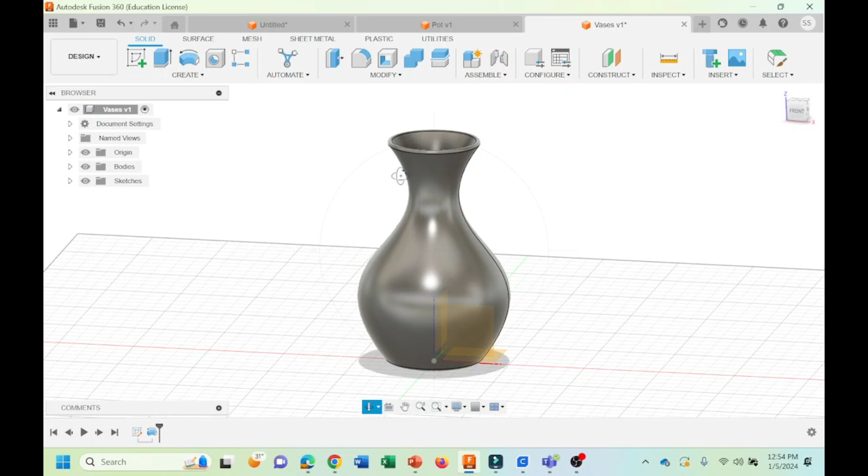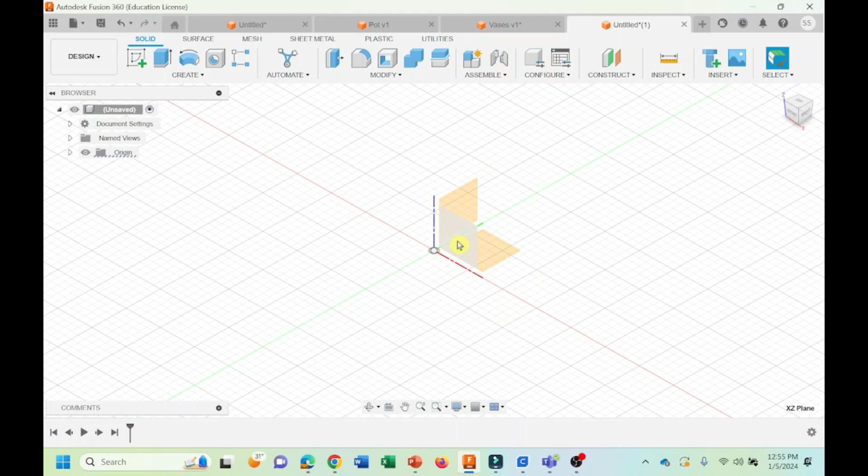So what we want to do, we want to design a vase like this, so we are able to change its shape and give it any different dimension. So let's see how we could do that. As usual, we are going to have a new design. I'm going to turn on the origin. I want to use the revolve and revolve it around the Z axis. For that reason, this time I'm using the XZ plane, right click and create my sketch there.

So if we go back to this, I could show you what I draw and then how I use the revolve. This is exactly what I'm going to draw. Then the revolve is around the Z axis. That means I need to use the line and also the spline to have this part. Then we are going to revolve that. So let's start to do that.

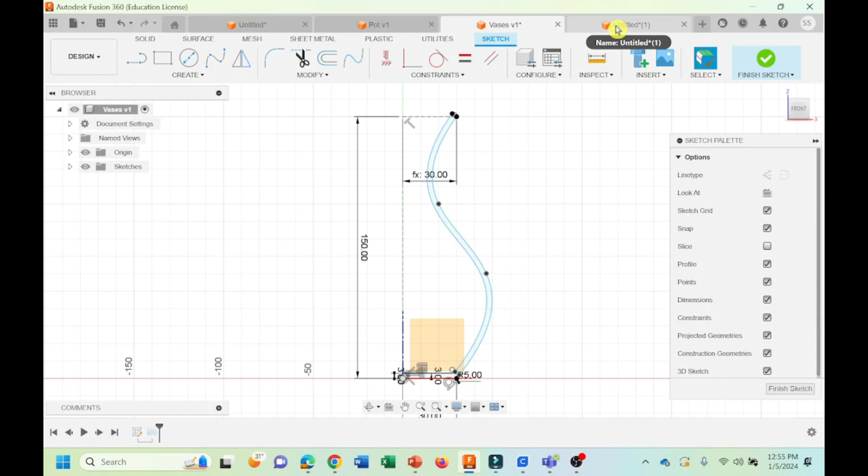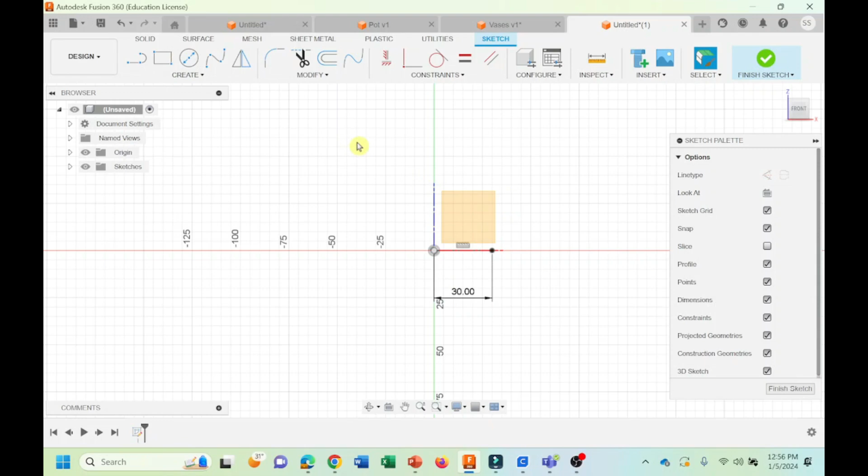For starting, first we are going to have a line. I'm going to use the line from here to here and use 30 millimeters, enter. The next line is going to show the height of the vase, so I need a construction line. Come here and go 150, enter. As you see, I have that 150. Another construction line from here, let's go 30 to that side, enter.

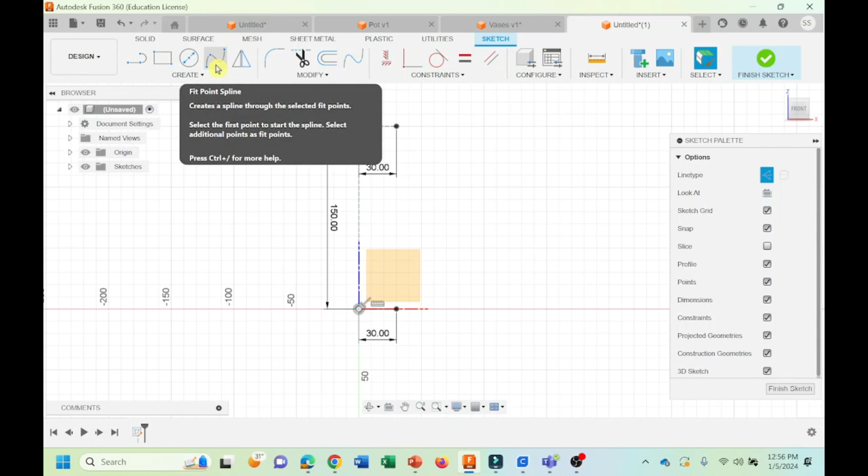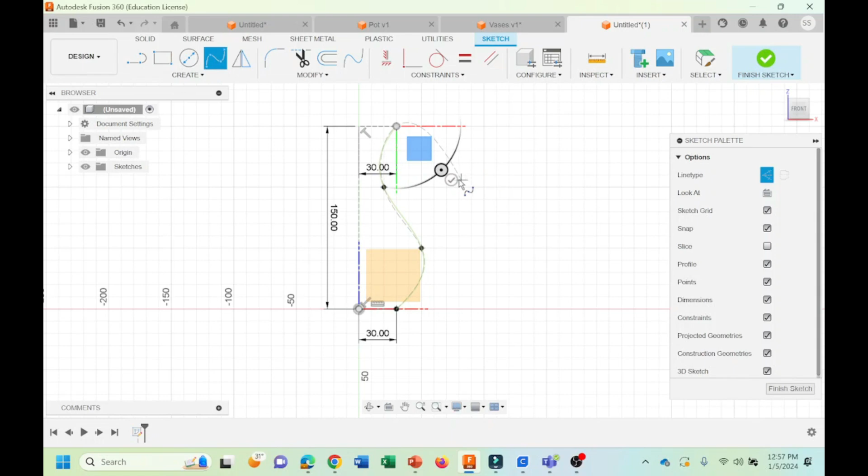So now after we have these 3 points, you come here and use the spline. I click on the spline, I click this point, come here, another click, come to this line, another click, and come to this point, another click. Whenever you want to finish the spline, you should find this tick mark here, usually somewhere on your working space. Now I found it, it changed to green, I click that.

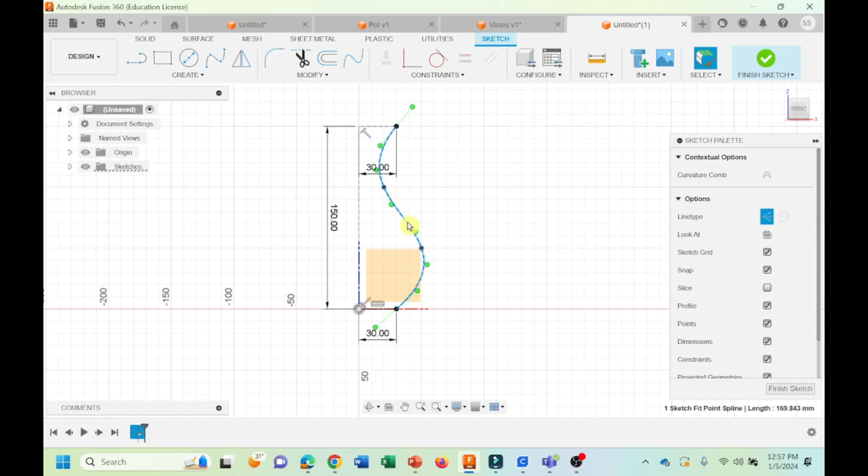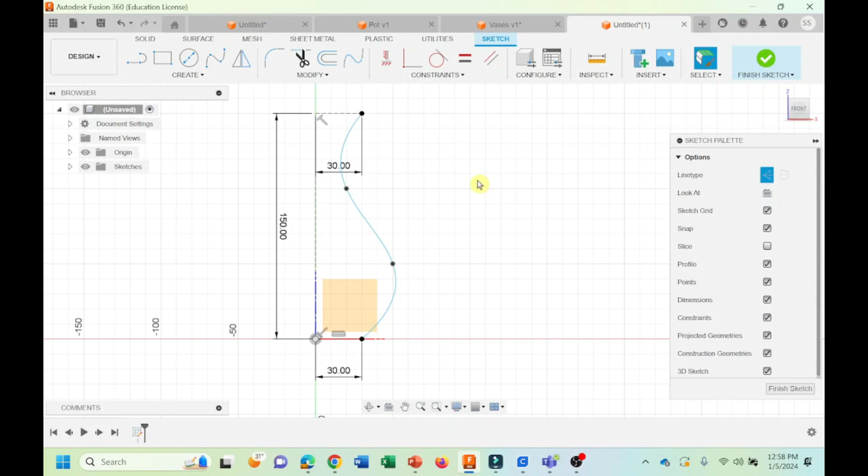As you could see, I made the spline. I don't want it to be a construction line, so I click on that and get rid of that. As you could see, we made the spline that you see here. Now I need to use the offset, to offset this by 3 millimeters, which will be the thickness of the vase. Come here, say offset, select all of these and go to 3 millimeters. Again, I don't want it to be a construction line, it should be just a line. If you zoom in a little, this shouldn't be a construction line, I fixed that.

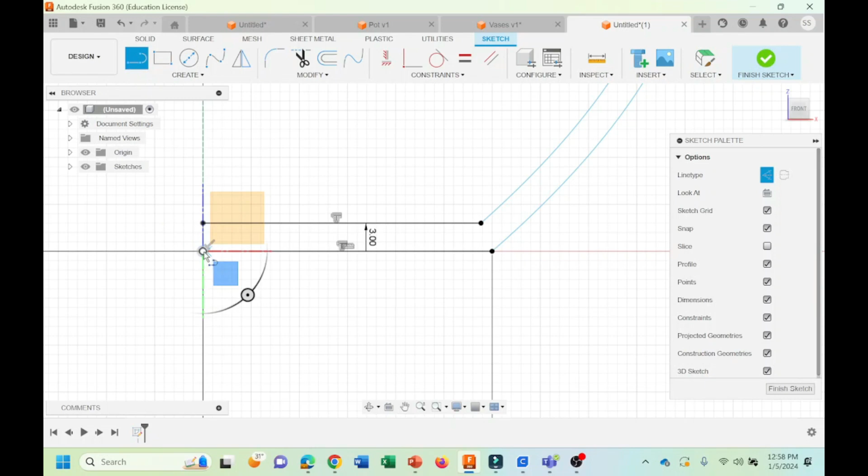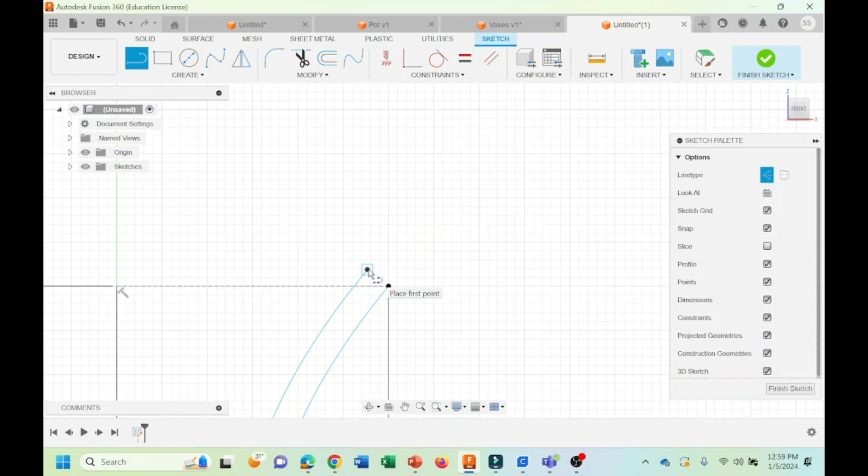Now I'm going to close these parts. I zoom in, I say line, I click from here to here, 3 millimeters, enter. Now I'm going to close the other side. If you zoom a little bit, first I'm going to use a construction line to connect this part to this part, enter. Let me redo that, it didn't get that. Let me try one more time. I say line, it's the construction line, from here to here, click. Yes, that should work. So now I have this.

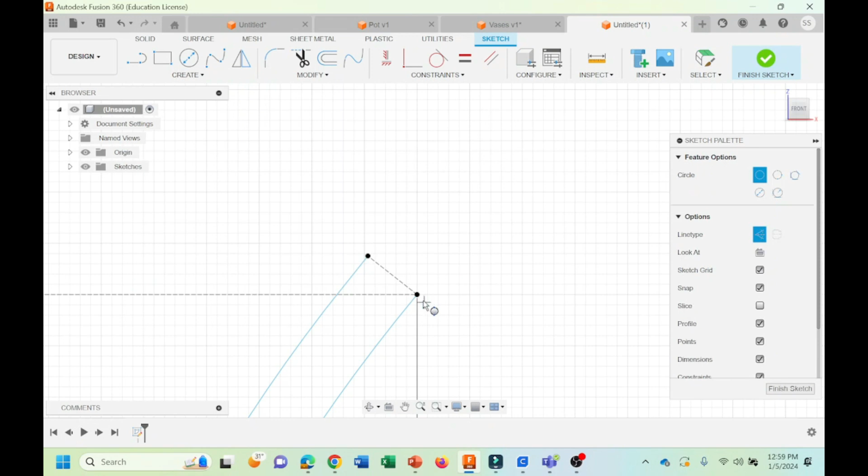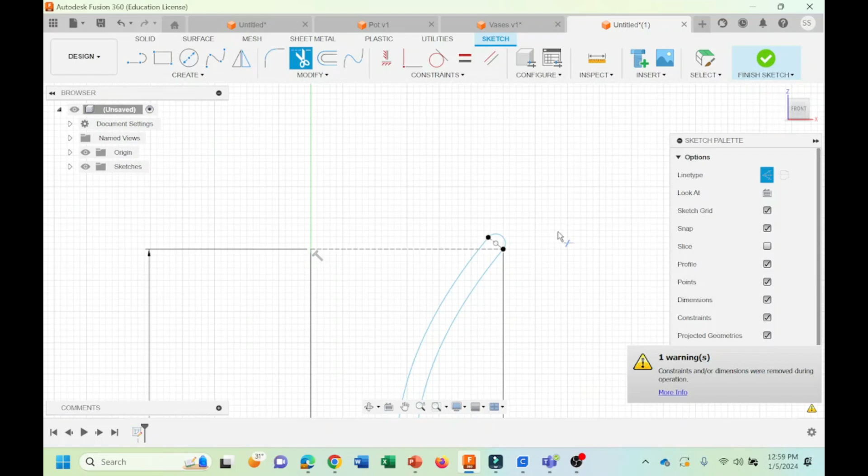I zoomed in a little more. Then I'm coming here and add a circle, a 2 point circle. I want a circle between these 2 points, enter. I don't want it to be a construction line, so I turn that into a real circle. Now I use the trim. I cut here and I also cut here. So see, I made this edge that you see. We are almost done. If you take a look, we have everything that we need. Now we could finish the sketch and use the revolve to make our vase.

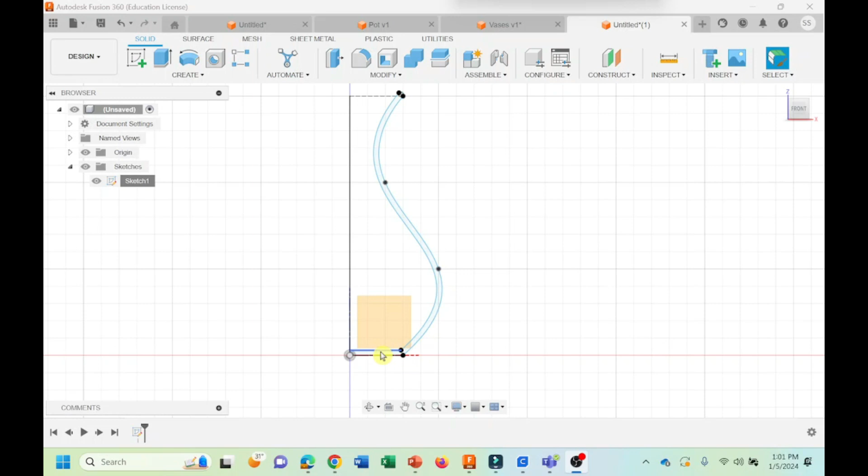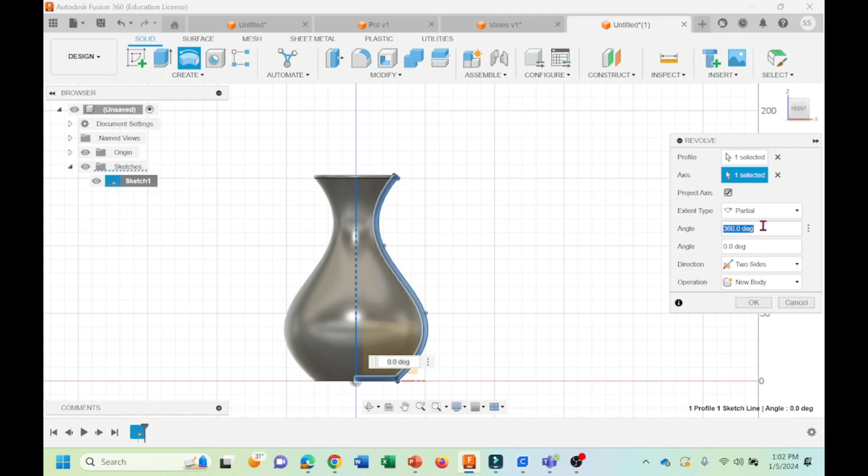Now I'm going to select this surface, maybe zoom a little and select the whole surface. You see what we selected. Come here and say revolve. For the axis, I'm choosing the Z axis. I put 90 degrees for now, let's take a look. See, it is 90 degrees. Okay, let's get rid of this and say 360. And you have this vase.

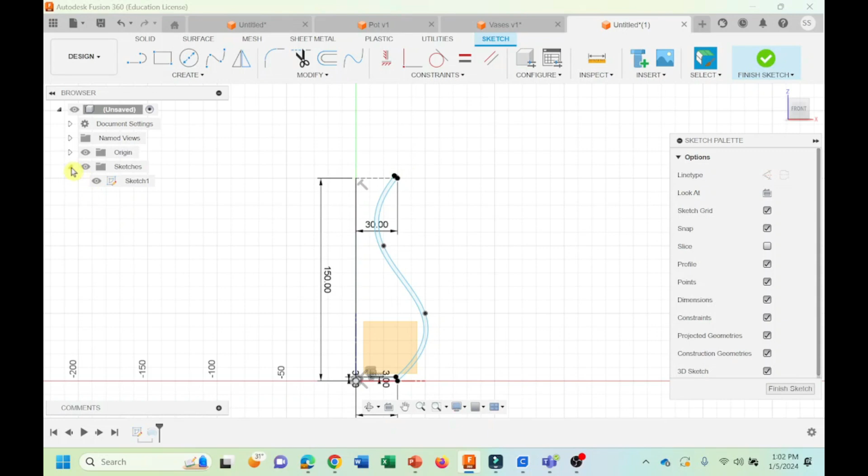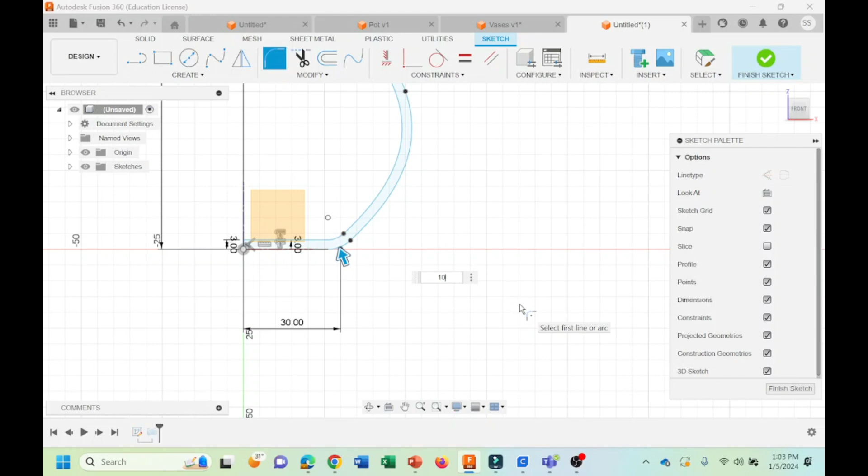Definitely you could go back to your sketch and make any changes you want if you are not happy with this shape. What I'm going to do, I come here, zoom a little bit, and use the fillet to make this rounded rather than a sharp edge. See, now it's much better. Let's say 7, maybe 10. Yeah, 10 is much nicer. Now you see it's actually nice. As you could see, you designed the vase using the spline and also the revolve command.